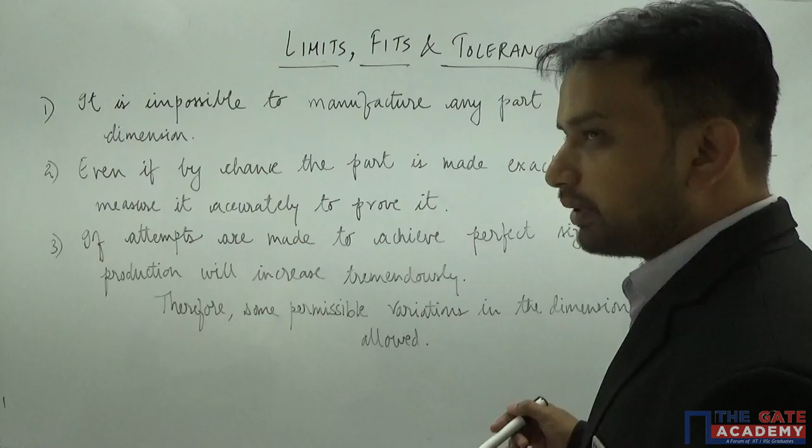I hope you have understood so far completely, and I'm going to jot down some points here because there are so many things to write today. So on the board we have mentioned the exact same thing we have already discussed. Let us go through all these points one by one. The first point says: it is impossible to manufacture any part precisely to a given dimension.

Even if by chance the part is made exact, it is impossible to measure it accurately to prove it. If attempts are made to achieve perfect size, the cost of production will increase tremendously. Therefore, some permissible variations in the dimensions have to be allowed. So now we have understood why the deviations occur, and we are going to step into the concept of limits, fits and tolerances.

After discussing the deviations, the first point you need to learn is the limits. What are the limits? Say this was the shaft that we wanted to manufacture, and its length was 100 mm. So instead of giving the manufacturer the design as exact, we are going to provide some relaxation to him, because we know he's a good and talented manufacturer.

There is no doubt in his abilities, even though because of all these factors there will be certain variations. So what we are going to do is provide a relaxation: if you can't manufacture it exactly 100 mm in size, it is okay if it lies between 99 mm to 101 mm. That means you are getting a relaxation of 2 mm, which would be easier for you to manufacture within this limit. Then he is going to agree because he has got a certain relaxation. So 99, which is the minimum limit, and 101 is known as the maximum limit. The size or dimension is made to lie between two limits, maximum and minimum.

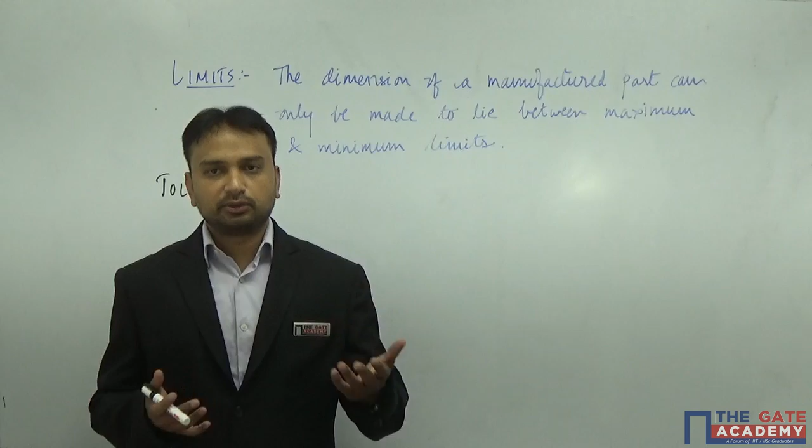Let us have a look at the definition of tolerance. The permissible variation in size or dimension is called tolerance. The difference between maximum and minimum limit is known as the tolerance zone. If the size of the component lies within this zone, it is accepted. If it crosses the minimum or maximum mark, it is rejected.

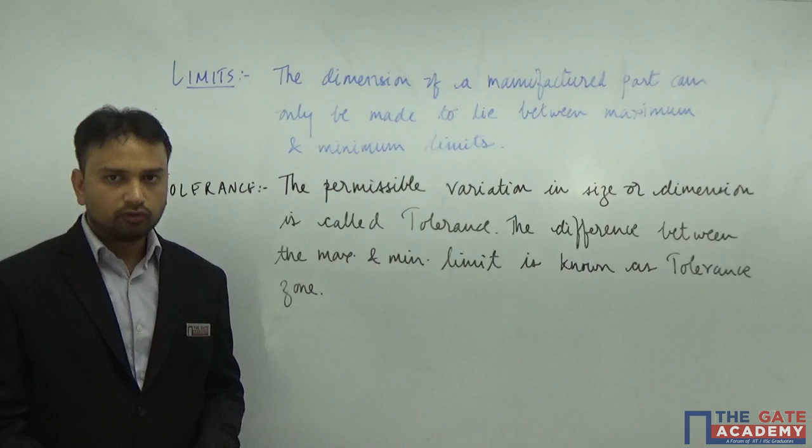After learning about limits and tolerance, let us talk about the systems of writing tolerance. The first system is unilateral. Unilateral means there is some basic size, which is the nominal size you desire, and the maximum and minimum limits have to be shown with respect to this basic size. The dimension of a part is allowed to vary only on one side of the basic size in the unilateral tolerance system.

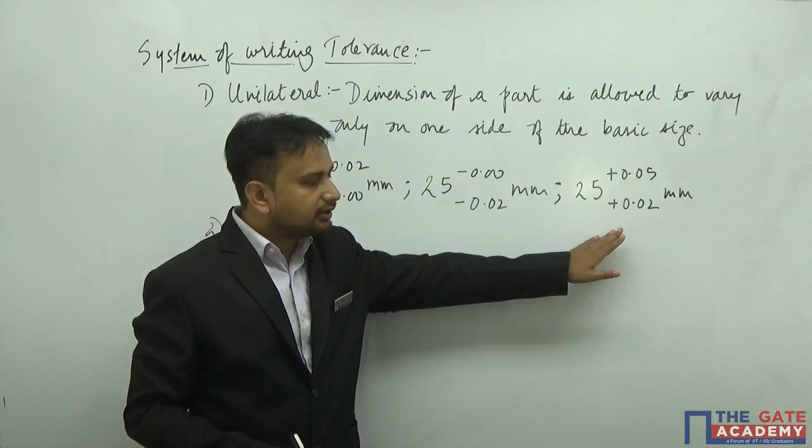For example: 25 plus 0.02, plus 0.00 mm. The basic size is the minimum limit itself, and 25 plus 0.02 is the upper limit. Similarly, on the negative side, the size may get bigger than the basic size, or smaller than the basic size, but in these unilateral examples it only grows bigger - it doesn't come down below the basic size. So the minimum limit is the basic size itself in these cases.

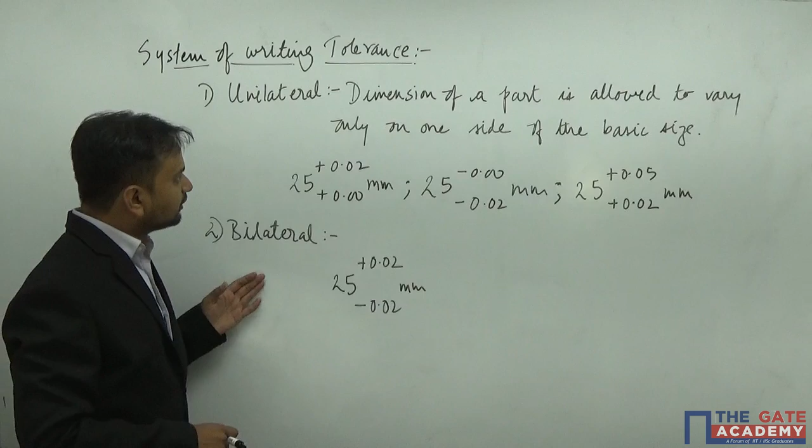This is known as unilateral tolerance, and similarly there is another system called bilateral tolerance. For example: 25 plus 0.02 and minus 0.02 mm. It can grow bigger than the basic size or become smaller than the basic size, but the dimension has to lie between these two limits. I hope you've got the point of the unilateral and bilateral systems.

Now let us move to the next point. After learning about the limits, the tolerances, and the systems of writing tolerance, it's time to discuss the different terminologies. There are many terminologies associated with limits, fits and tolerances. Before we start solving numerical problems, we have to go through all this theoretical part and these terminologies, which are very simple to understand - nothing complicated at all.

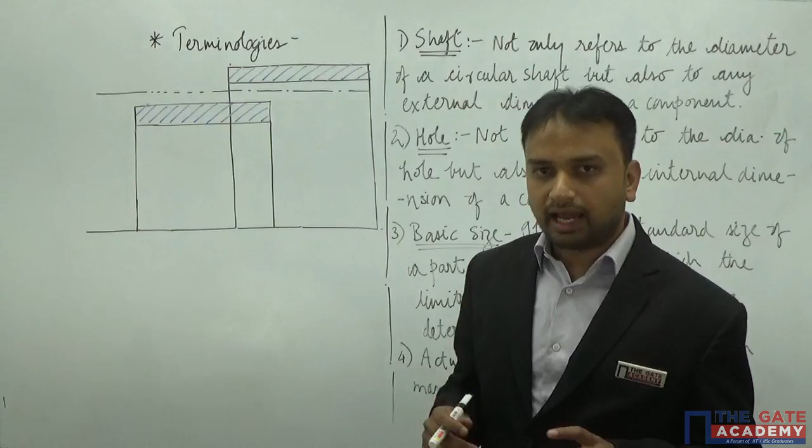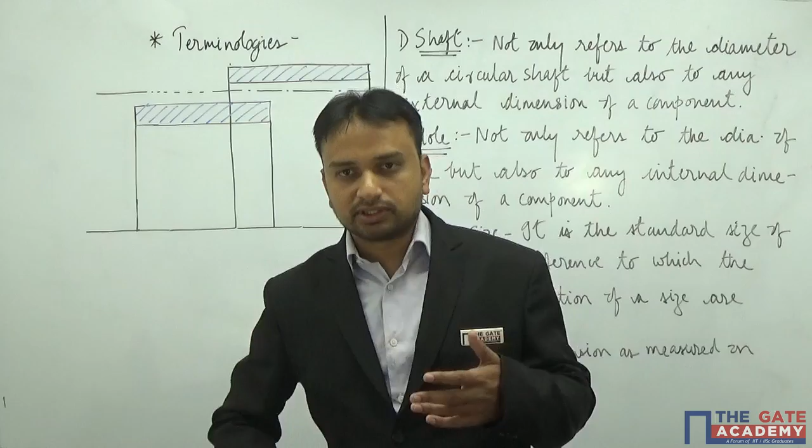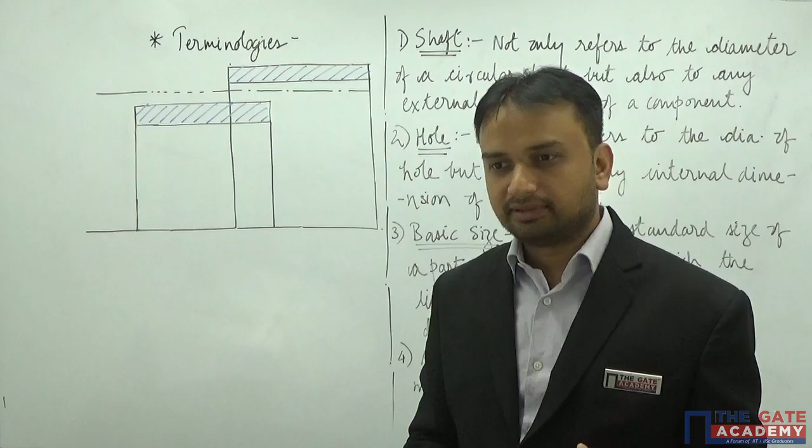Firstly, we are going to look at diagrams of this kind, and by now you would have recognized that this diagram shows a shaft and a hole. This outer, bigger rectangle is the front view of the hole, and there is a shaft which is smaller in diameter with respect to the hole, because a shaft goes inside a hole in any assembly. Take the example of this marker and its cap - let's say this is the shaft and this is the hole, and it goes inside and gets placed like this, and this is how we get an assembly. In a similar manner, all assemblies are assembled.

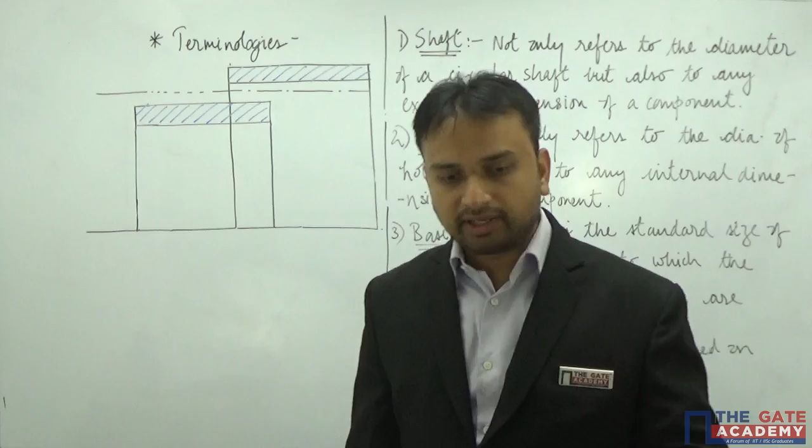So just now we have determined that you provide the limits to everything that you manufacture, whether it is hole or shaft. In a similar manner, hole has got two limits. The hole could be as big as this size from here till here, and it could be as small as this size from here till here. Also, the hole could be of any size between these two dimensions, lying anywhere within the shaded area.

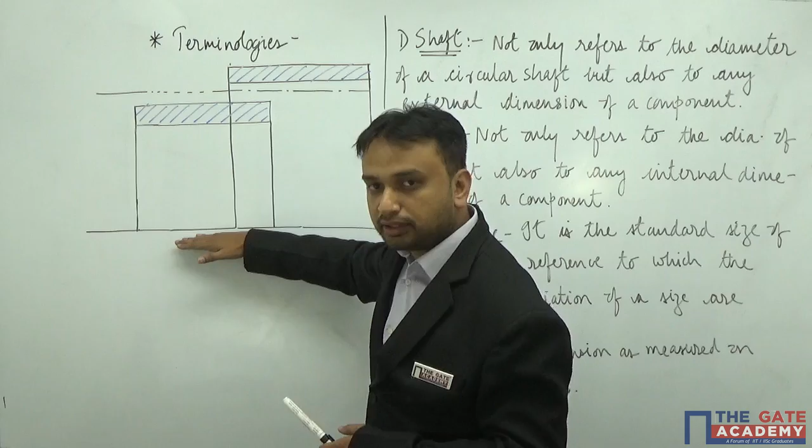In a similar manner, the shaft could be as big as this dimension from here till here, or as small as this size from here till here, or it can lie anywhere between this dimension and any point over here in the shaded area. I hope you have got the point. So this is nothing but the tolerance zone.

Now we are going to talk about certain terminologies. As you can see here, the shaft - wherever we refer to shaft, it is not the actual shaft always. Shaft not only refers to the diameter of a circular shaft, but also to any external dimension of a component. It is not necessary that we are going to assemble shafts only every time.

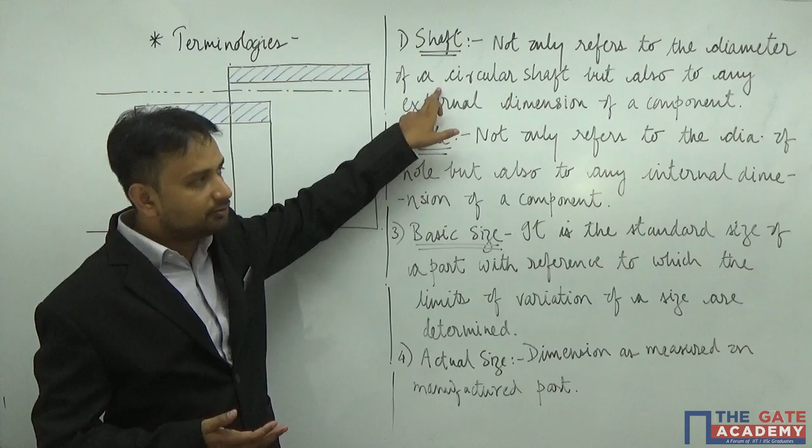Assembly could be of anything. So it does not only refer to the diameter of a circular shaft, but also to any external dimension of a component. In a similar manner, hole not only refers to the diameter of the hole, but also refers to any internal dimension of any component. I hope by now you are getting the point.

Now, basic size - as we have already discussed, what is basic size? It is a size with reference to which you determine the limits. It is the standard size, as the definition says, of a part with reference to which the limits of variation of size are determined.

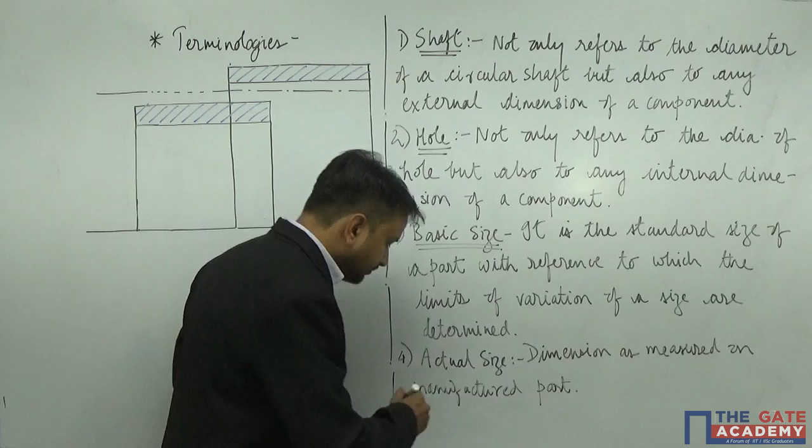And there is another thing called actual size. Now what is this actual size? Actual size means the dimension as measured on the manufactured part. And now you also understand that there will be a difference between actual size and the basic size.

Let us move to a few more terminologies. There are many terminologies actually we have to see, so let us buck up.

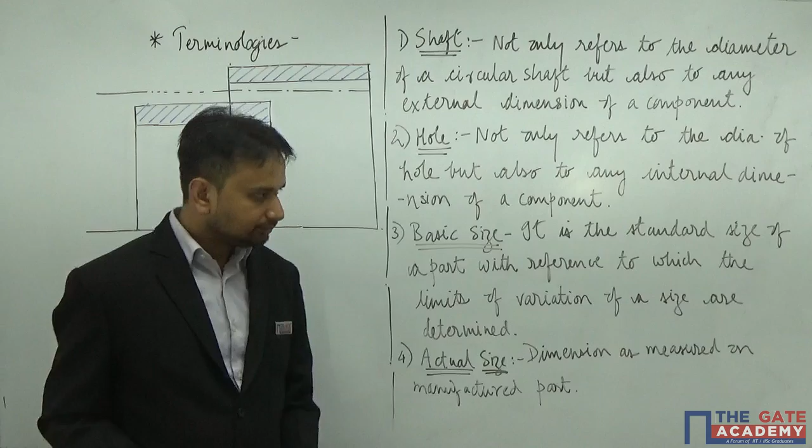Now the next point I want to tell you is zero line. What is zero line? A straight line drawn to represent the basic size. Now could you indicate zero line on this diagram? Yes, absolutely - this is your zero line over here. This line that runs between the sizes of shaft and the hole, this is the zero line, and it represents the basic size. So this size is going to be your basic size - this is your basic size.

Similarly, there is another term called deviation. Now what is deviation? It is the algebraic difference between the actual size and the basic size. Now there are two kinds of deviations: upper deviation and lower deviation.

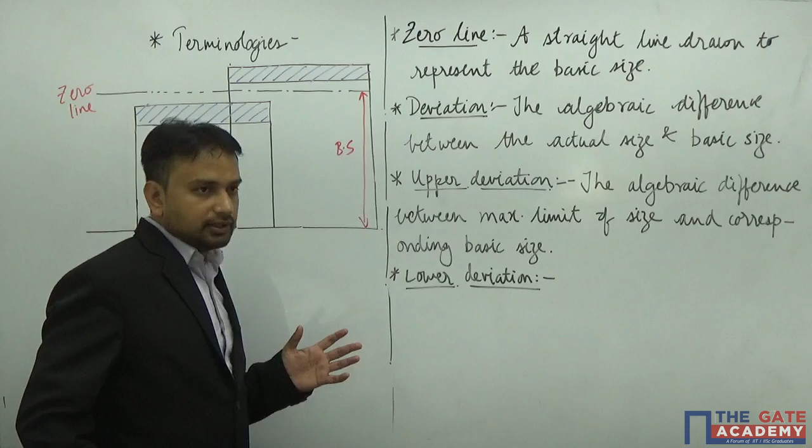Upper deviation means the algebraic difference between maximum limit of size and corresponding basic size. Let us read it once again: the algebraic difference between maximum limit of size and corresponding basic size. So if I have to determine the upper deviation for a hole - this is the hole, and the maximum limit of size, the hole could be as big as this dimension, right? And the difference between these two is nothing but the upper deviation. So this is your upper deviation.

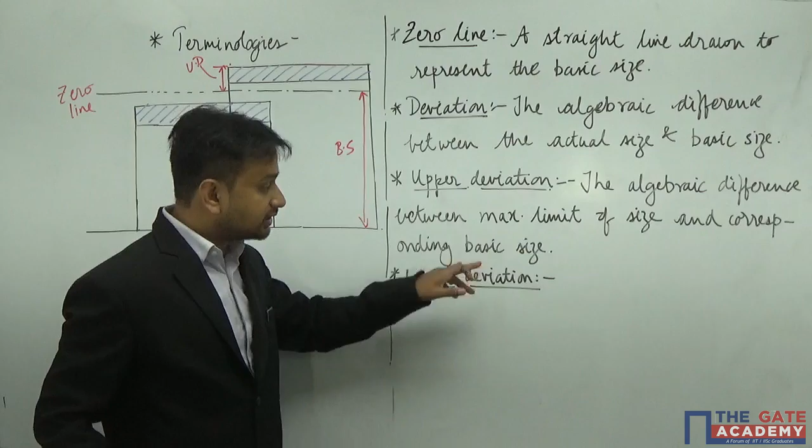In a similar manner, if you have to talk about the lower deviation - what is lower deviation? It is the algebraic difference between minimum limit of size and the corresponding basic size. This has been left up to you since you can easily follow that it is the algebraic difference between minimum limit for lower deviation, and corresponding basic size. That means for hole, the minimum limit is this - there is a little lesser space, so I am extending this line over here. I hope you can follow. So this line over here is nothing but your lower deviation. This is your lower deviation.

In a similar manner, you can determine both of these deviations for shaft. The shaft could be as big as this size, so the upper deviation will be over here. It is going to be this smaller region.

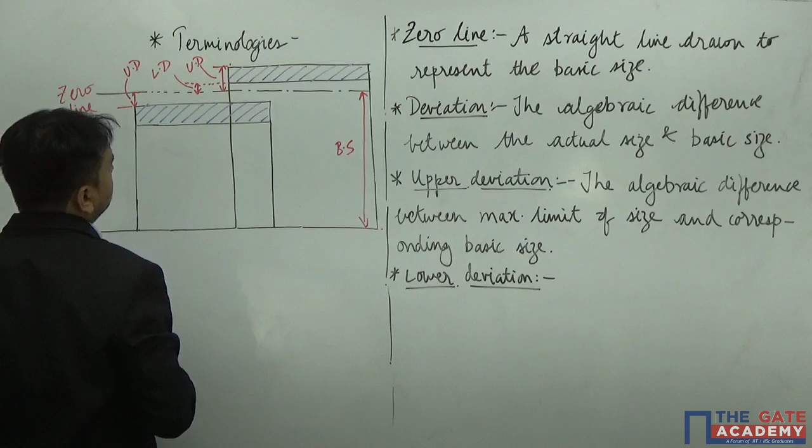So this is your upper deviation for shaft. In a similar manner, for lower deviation, it's the difference between the lower size and the basic size. So we have understood the concept of deviation now, right?

Let us move to the next very important term called fundamental deviation.

Alright my friends, now let us proceed to a very important topic called fundamental deviation. Let us firstly learn the definition for the fundamental deviation. What is that? It is one of those two deviations, either upper or lower, whichever is nearest to the zero line for either hole or shaft.

So fundamental deviation is for both hole and shaft. It's not like it's only for hole or only for shaft. It is one of those two deviations which is the smallest.

So if I have to say what is the fundamental deviation for hole, you are going to say the lower deviation. What is the fundamental deviation for shaft? You can see it is the upper deviation.

Sometimes fundamental deviations are zero also, depending upon which kind of system you are going to opt for, whether it is a hole-based system or a shaft-based system. We are going to learn about that later. But as of now, this is fundamental deviation - it is nothing but the smallest deviation in an assembly, whether it is lower deviation or upper deviation.

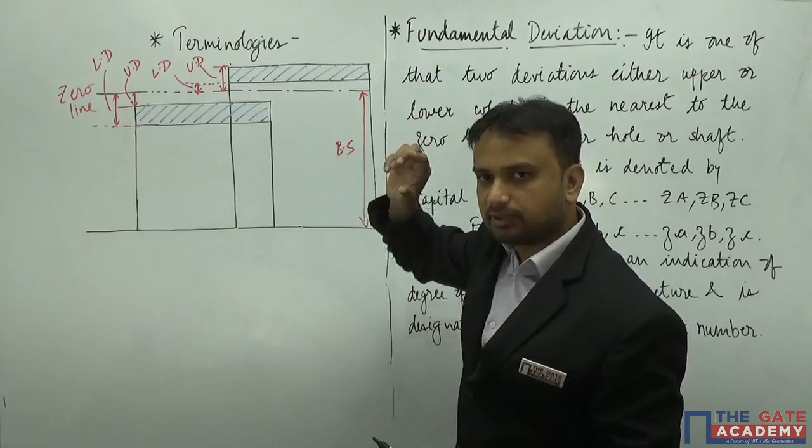Now how do you actually show it on the figure? If I have to tell you through this figure, where is the tolerance zone or the tolerance grade? You can see this strip - I have shown this strip to be a little thinner as compared to this one. That means the tolerance grade for the hole is smaller than that of the shaft.

Let me give you a wonderful example for that. Suppose when you make projects in your final year, you go to a manufacturer - suppose it's a very big company, and it takes very sophisticated orders also from NASA, ISRO and DRDO organizations like that. You also go there and ask them to manufacture a shaft. You speak to the engineer: sir, could you please manufacture a shaft of let's say diameter 50 mm. 50 mm is the diameter of your shaft.

Now he said, because it is a college project, you will not be very specific about the dimensions, are you? You said, no sir, it's simply a college project. So even if you make it 45 mm, we are fine by that. Even if you make it 55 mm, we are fine by that also. Although I have taken a huge amount of deviation, usually such deviations are not allowed, but since I'm explaining, I'm taking that liberty.

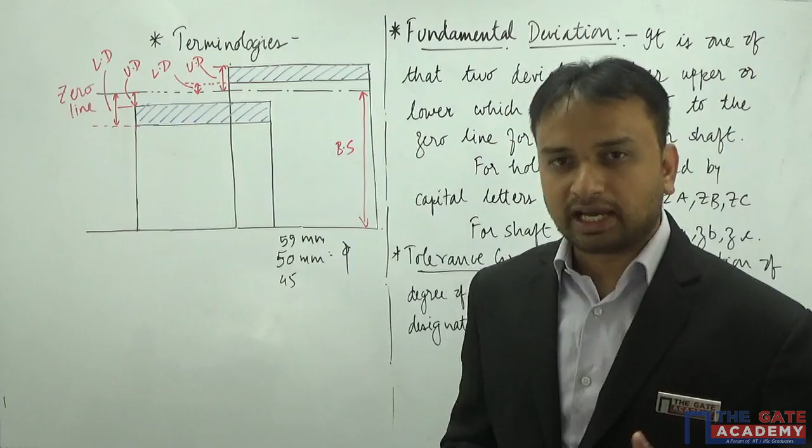So that means you have got the deviation of 10 mm. You can see it's a huge deviation, right? And because of that he said, earlier I was charging 5,000. I thought you required a very sophisticated or very accurate shaft. Now, because you're saying you're not specific about the dimension, I can produce that for 3,000.

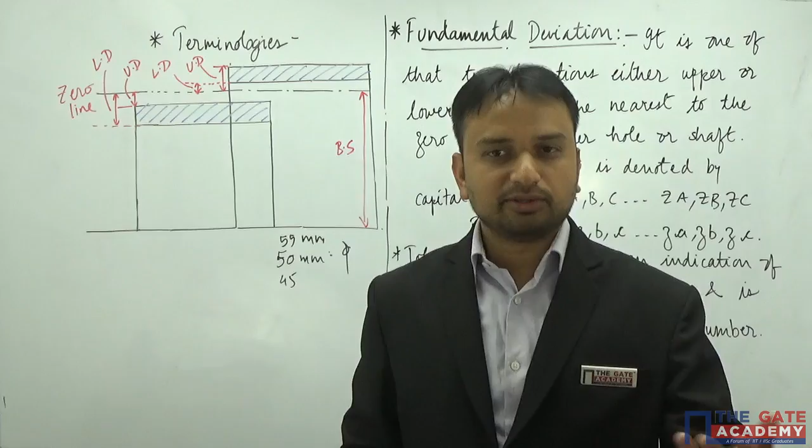So you were very happy and you came back. Now what happened just after you came back? Another order approached him, and this time the order was from, say, ISRO. ISRO or DRDO approached this guy and said, sir, again we want you to make a shaft, and its diameter is going to be 50 mm, but there are certain challenges for you. Actually, we want it to be really accurate.

So our plan is that it is not going to differ much. If you cannot manufacture 50 exactly, which is our required dimension, we will be okay with 49.8 mm and 50.2 mm, like this. So 49.8 mm till 50.2 mm is okay with us.

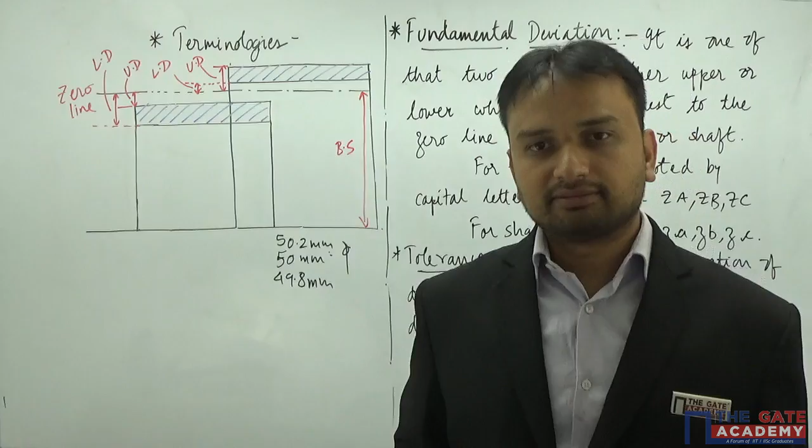Getting the point? So what is happening here is this shaft that he is going to manufacture for an organization such as ISRO, where they are very specific about the dimension, its price is going to increase. But for you people, because it was a college project, it was just 3,000 rupees.

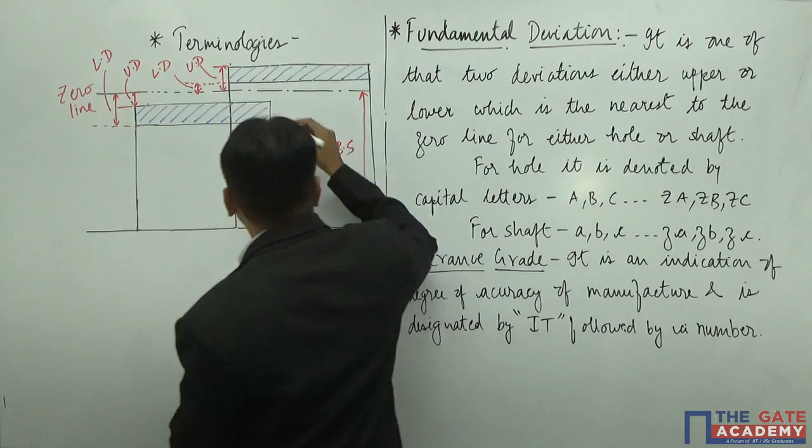The idea behind this explanation is that this tolerance zone can be bigger, like this. You can also show it or indicate like this. It can grow bigger like this. Also, it can become very small, very, very small.

So what does it mean when it is bigger, when it is wider? That means you have got a huge amount of tolerance, meaning it's some kind of college project. And when it is very, very narrow, very thin, that means they are really, really specific about the dimensions. That is why the prices change, the prices vary. So this is what we understand from this statement: it is an indication of the degree of accuracy of manufacture.

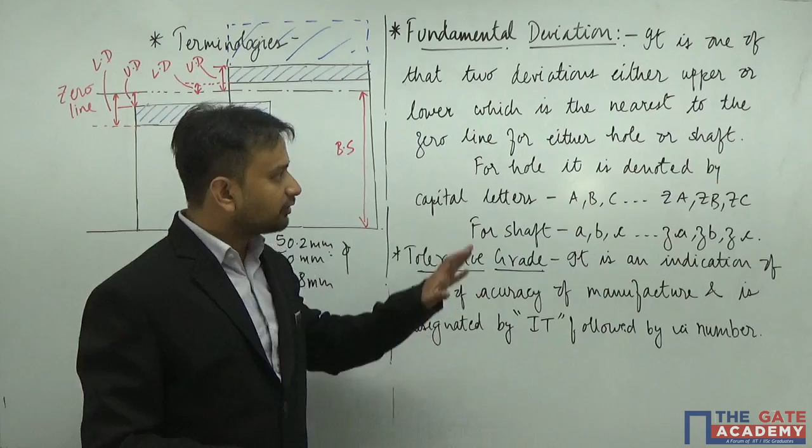If it is narrow, accuracy is more, and it is designated by IT followed by a number. We are going to talk about this later. But as of now, I hope you have understood the concept of fundamental deviation and the tolerance grade. Let us move to the next point.

Alright my friends, let us have a look at the next point, which is also very important, called fit. Now what is a fit? It can be defined as the degree of tightness or looseness between two mating parts.

So suppose an assembly, you will find that some assemblies are very easy to assemble because there is a lot of room for those two mating parts to adjust. And some are really, really tight because there is a very small amount of room. Sometimes you have to push, you have to apply a lot of effort in placing those assemblies. So a fit is nothing but the degree of tightness or looseness.

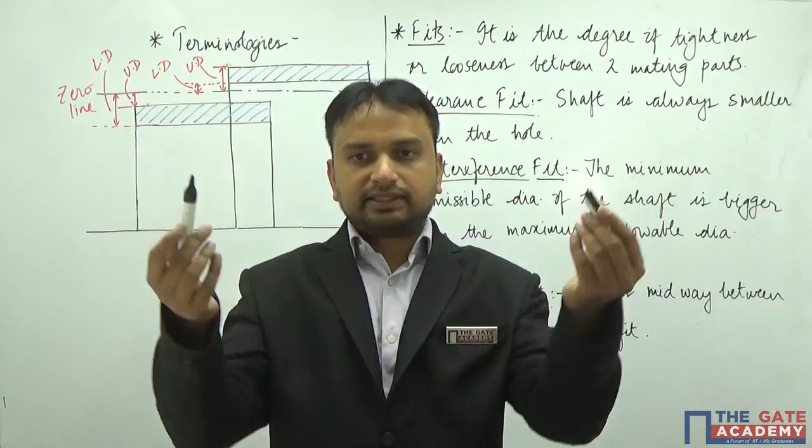So let us take the example of this marker here once again. You can see that this marker goes inside this cap very easily, but till we hear a click, we know that it is not yet done. So what we have to do is apply a small amount of force like this, and now it's done. I hope you can also hear the click.

So this click actually signifies that it is a tight fit. You have to force this marker to go inside the cap and be secure there, like this. So this actually creates an airtight seal, isn't it? So that means this is a tight fit, and tight fit actually resembles interference fit.

Now let us talk about all the fits from the beginning. Clearance fit.

Clearance fit means the shaft size is always going to be smaller than the hole. Now you may ask, sir, the shaft size is going to vary, right? Even in the figure, the size of the shaft varies. You can see this is the shaft, this is the upper limit of the shaft, and this is the lower limit of the shaft. So which size are you actually talking about?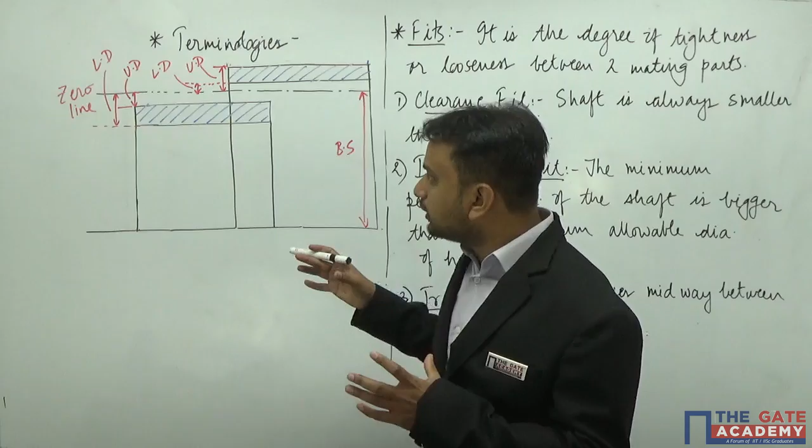That's a very nice question. Actually, I mean the maximum size of the shaft. If you take this size of the shaft, even this size is going to be smaller than the minimum size of the hole. You can see this is the minimum size of the hole, and when you place them together, you will always find a clearance between them. So this kind of fit is known as clearance fit, where the shaft is always smaller than the hole, no matter which limit you're talking about. I hope you have followed the clearance fit.

Now let us move to the interference fit. Interference fit means the minimum permissible diameter of the shaft is bigger than the maximum allowable diameter of the hole. That means the smallest possible shaft you can think of in one particular assembly is also larger than the maximum allowable diameter of the hole. Getting the point? Let me draw a figure for that.

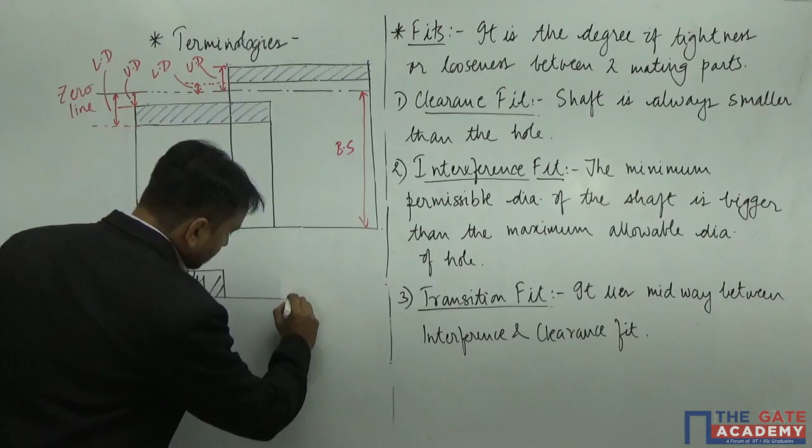So usually what we do is take this zero line, draw it like this, and represent the hole like this. I am considering a hole basis system. For those who don't know what a hole basis system is, don't worry, we'll cover that soon. For now, just accept that it is a hole basis system. Suppose the hole is 50 mm, the basic size, indicated by the zero line, and the minimum size of the hole is 50 mm itself, and the upper limit is 50.5 mm. That means this is the tolerance grade or tolerance zone of 0.5 mm. So the hole can vary by 0.5 mm like this.

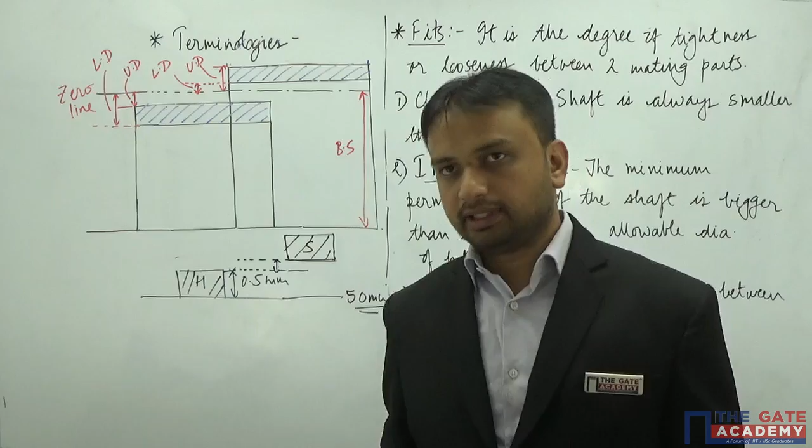And the shaft is going to lie somewhere over here, because the lowest possible size of the shaft is also even greater than... suppose this was the upper limit of the shaft. Now let us see, this is the lowest limit for the shaft. That means there is an overlap. This kind of fit results in an interference fit, where you have to force the shaft to move into the hole and reside. Getting the point? So this is nothing but the interference fit, also known as tight fit.

The best example I can give you, which you have also observed, is your lunch boxes and tiffin boxes. You must have heard of Tupperware, a company that produces airtight containers, especially tiffin boxes and water bottles. They are famous for creating airtight containers. How do they manage to create airtight containers? It is all about the fit, the degree of tightness or looseness.

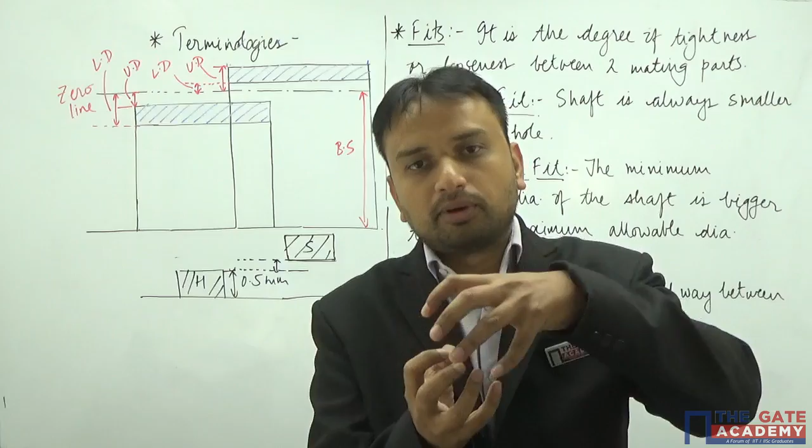You must have observed that placing the cap over the container in Tupperware containers is not an easy task. You have to apply a certain amount of effort to do that, because the caps are made a little smaller than the size of the container. That is why they are able to hold it properly and create an interference fit. The exterior dimension of the container is bigger, whereas the cap is smaller. So you have to stretch it, since it is a stretchable material, and that is why it holds and becomes airtight. I hope you have followed my example.

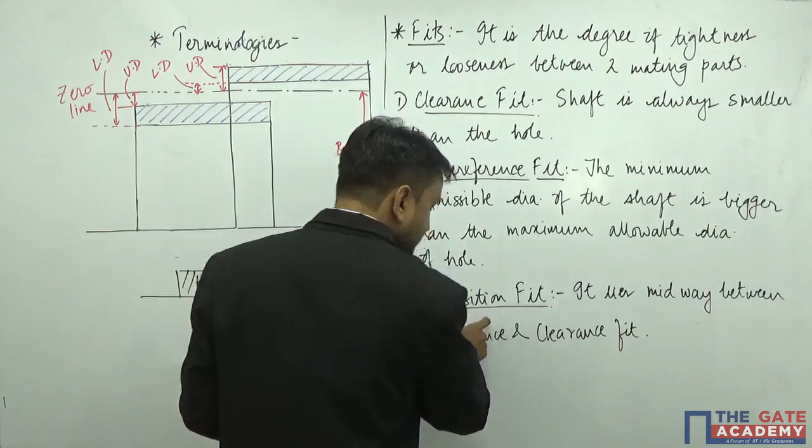Now let us move to the next point. It is known as transition fit. Now what is a transition fit? It lies midway between interference and clearance fit.

So what happens is that for the same hole and shaft assembly, you are going to obtain clearance fit sometimes, and sometimes you are going to obtain interference fit. Now how is it possible? I want you to think over it. It's a point to ponder. So what you have to do is think about when this case is possible, sometimes you obtain an interference fit, sometimes a clearance fit.

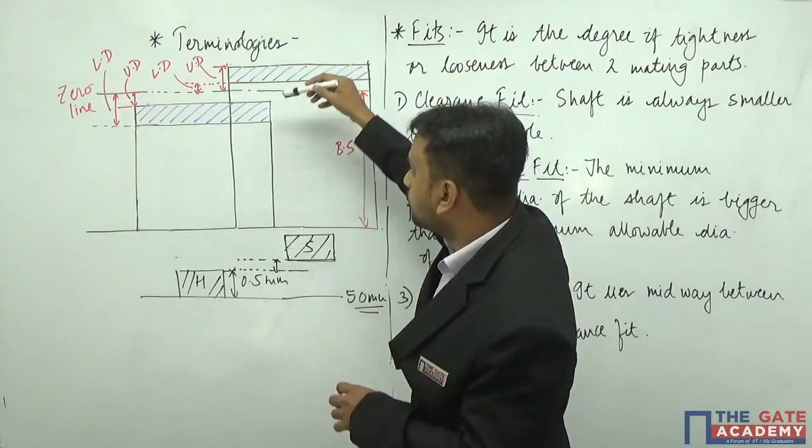Let me give you a hint: this whole magic lies between the tolerances, where these tolerances actually lie. I told you that the hole could lie between any size, between these dimensions. It could be like this, over here. It can have any number of dimensions between these two limits. Similarly, the same thing goes for the shaft. Now what you have to do is think of such a system where these limits coincide.

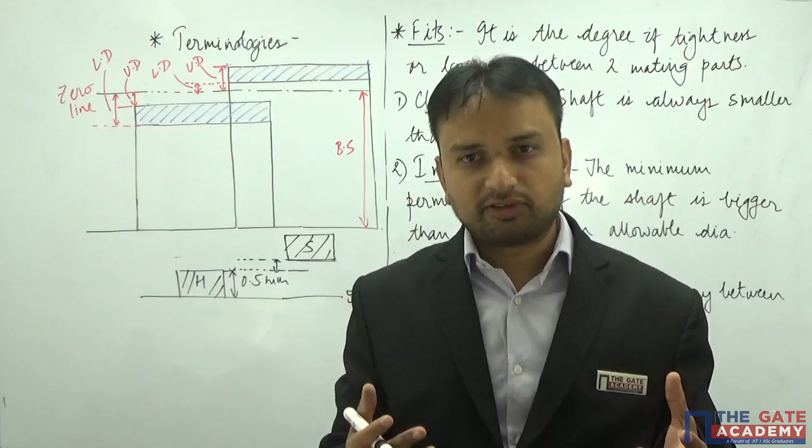Now I have given you enough hint. I want you to think about it and do it yourself. A small home assignment for you. Now let us move to the next statement.

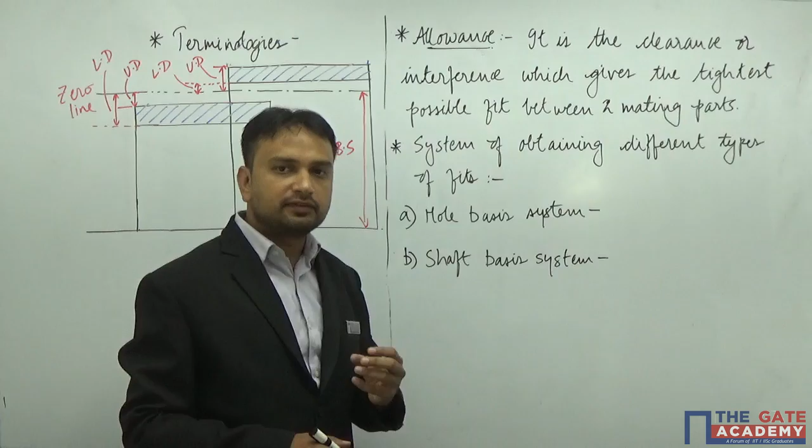Alright friends, let us move to the next important point called allowance. Let us define it first: it is the clearance or interference which gives the tightest possible fit between two mating parts. Let us read it once again: it is the clearance or the interference which gives the tightest possible fit between two mating parts. So any clearance or any interference that gives the tightest possible fit is known as the allowance.

If you are not able to follow it the first time, read it once again, and I'm going to anyway give you an example. We are going to solve an example that will showcase the allowance. So it is the clearance or interference which gives the tightest possible fit between two mating parts.

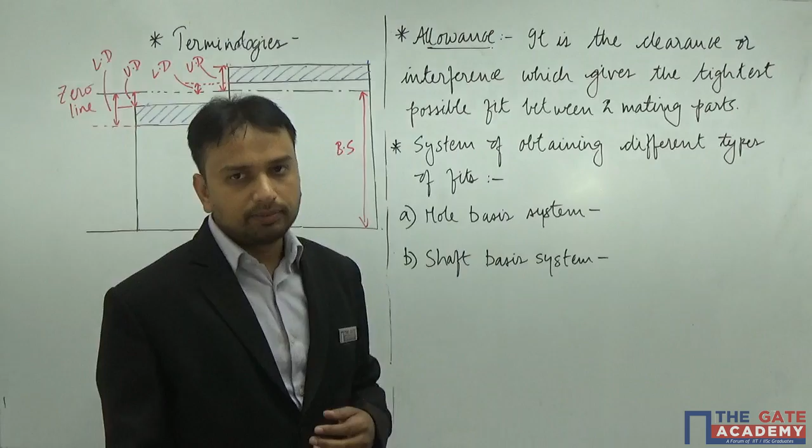Now let us talk about the systems of obtaining different types of fits. We have just now covered an important point called fits, and now we are going to learn about the different systems of obtaining different types of fits. So the first system is the hole basis system. Now what is the hole basis system? Let me tell you that. So the hole basis system

utilizes the fact that firstly, a hole will be created and the shaft dimension will be determined on the basis of the hole dimension. After learning about the hole basis system, let us talk about the shaft basis system. It is of a similar kind; the only difference is that the shaft dimension will be determined first, and then the hole dimension will be determined. Now which one are you going to prefer?

As engineers, we prefer the hole basis system. Why? Because it is easier for us to firstly drill a hole and design a shaft based upon that dimension. In the shaft basis system, the shaft will already be there, and then to make a hole of that dimension where the shaft can reside securely, you need a long process. If you're literally talking about a hole for the shaft, you need a manufactured drill bit, custom made only for that shaft, which incurs a lot of money, effort and time. So to reduce our effort, time and money, we go for the hole basis system. It is generally more preferred.

Getting the point? Yeah, so that's all about the hole basis system and shaft basis system. Now let us move to the next point. Now we are going to discuss the designation, which is a very important topic — it's like the heart of this chapter, limits, fits and tolerances.

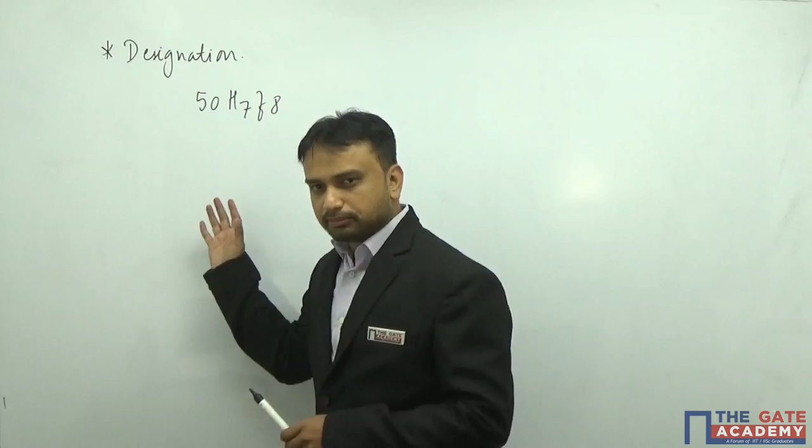So what happens is that whenever you create an assembly, you designate that assembly in some manner. We'll keep on jotting the points also. Now what is this 50 over here? Let me tell you, this 50 is the basic size. So 50 over here is nothing but your basic size.

Now we learned that something for a hole is represented with capital letters. What was that? That was the fundamental deviation, if you can recall. Fundamental deviation is the nearest deviation, whether it is upper deviation or lower deviation, for a hole or a shaft. Getting the point?

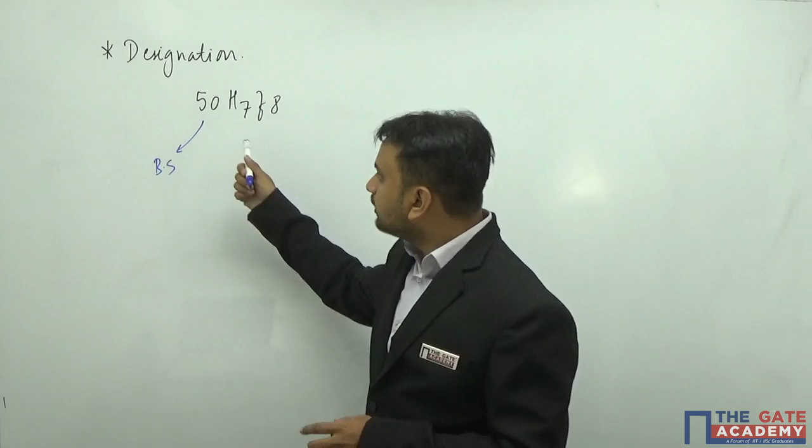So H indicates the fundamental deviation, and you have already learned that it is designated using capital letters. So this is the fundamental deviation, but for what? For hole, because it is capital letters. So fundamental deviation for holes.

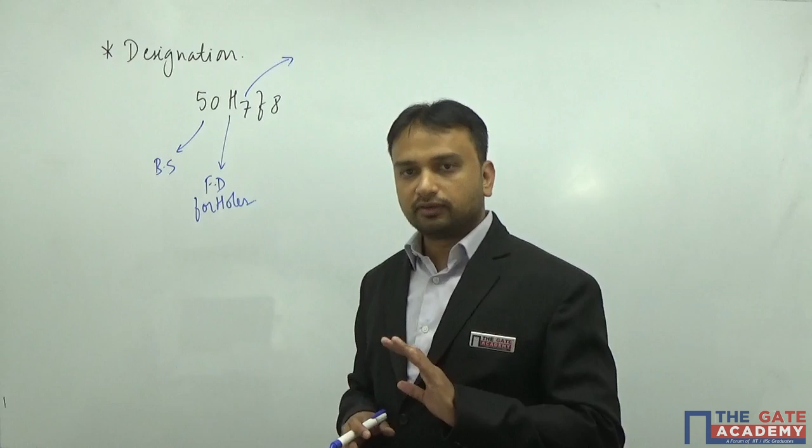And what is this 7 here? I have not told you about this thing yet, so let me tell you directly that 7 indicates the tolerance grade. Remember, in the definition of tolerance grade, we saw that IT, the tolerance grade, is represented using IT followed by a number. That number is nothing but this 7. Now the only thing is that we are not representing IT in the designation, but actually it stands for that itself.

Just be patient, we are going to cover the entire thing very systematically. So this is your tolerance grade. Tolerance grade, now for what? Of course it is for holes, because 7 is associated with H, right?

In a similar manner, you can see this F over here, and by now you can understand fundamental deviation. It is a fundamental deviation, but for what? It is for the shaft, because it is represented in small letters. So this is the fundamental deviation for shafts.

And what does this 8 stand for? Again, 8 represents IT8 actually. Since we are talking about the designation, that is why we don't have IT mentioned over here, but actually it stands for the same thing, IT8. Now I will be telling you about the importance of IT8 and IT7, just let us finish this part.

So this is tolerance grade again, but for what? For shafts. Very good. So this is your designation part. I hope it is very clear to you, right?

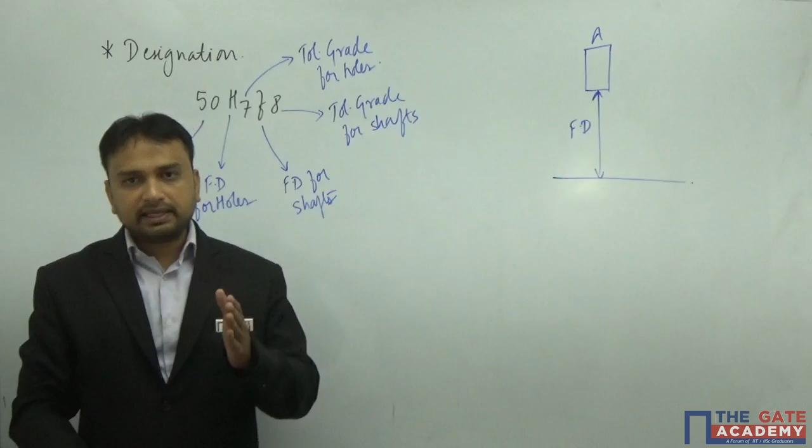In a similar manner, for B it is lesser, C is even lesser, CD, D, E, EF, and so on and so forth. You can see that it goes down also, right? Starting from A till ZC, it declines. The fundamental deviation is declining.

Now there is one special case for the hole basis system. What was that, and what is that? When it is coming down, it is declining like this, and you can see that at one particular point the fundamental deviation becomes 0. What is that? What is the code name? It is H. So whenever you see H mentioned anywhere, you are talking about the fundamental deviation which is 0, and for whom? For holes, because it has been represented in capital letters. I hope that it is clear.

We are following the exact same thing, but the direction and the representation is different. They are represented in small letters. So A, B, C, then CD, D, E, exactly the same thing, till ZC it is going on, right? Now it is climbing up.

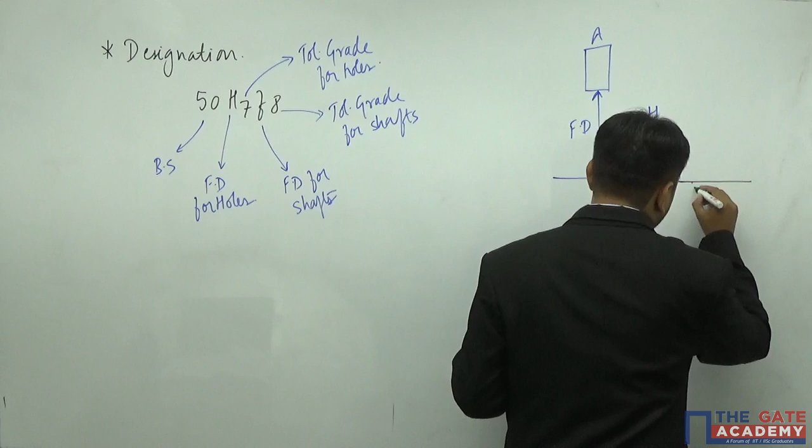Now you can see there is a special case. The fundamental deviation for shaft becomes 0 at one particular point while climbing up. What is that? It is small h. Yeah, so for these two special cases, the fundamental deviations are 0.

That means how many fundamental deviations are there? There are 28 types of fundamental deviations. If you want, you can count them from A to ZC. There are 28 fundamental deviations. I hope it is clear, and how it has been represented, it is also clear.

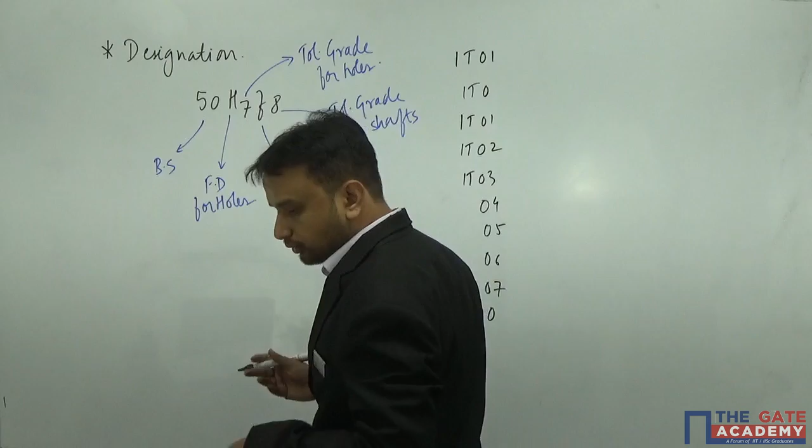Now let us talk about the tolerance grade. The tolerance grade is actually given by, it starts from IT01, IT0, right? IT0 and IT01, IT02, IT03, 04, 05, 06, 07, 08... or no, just a minute, I made a small mistake. Sorry, there will be no zeros over here now. So after IT0, it will be IT1, 2, 3, 4, 5, 6, 7, 8. Similarly, 9, then 10, 11, 12, 13, 14, 15, and 16. And everywhere it is IT, like this, okay? IT7, IT8, IT9.

Now these are just the codes, okay? They contain some meaning, right? But for that you have to deduce the meanings. Now what happens is that when you're talking about the accuracy, these IT grades are actually so fine that we do not use them for general purpose. So let us not talk about these IT grades, because they are very fine, very small. That means when you move upwards till IT01, your accuracy is actually increasing.

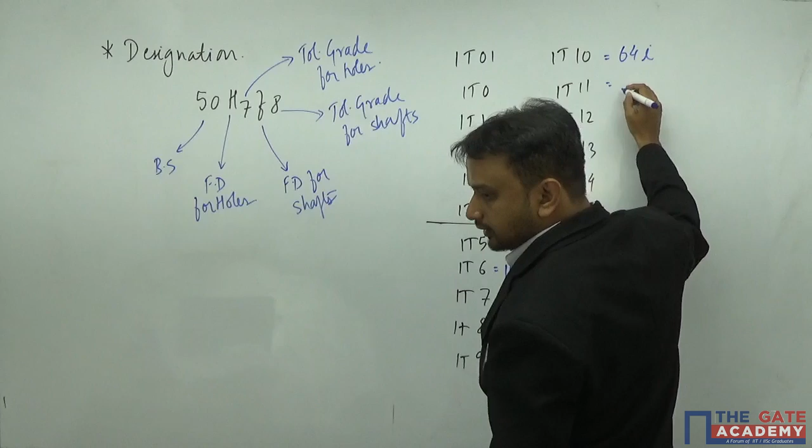Now let us talk about IT5 onwards. IT5 has some value, and what is that value? Let me indicate that with a different ink. It is 7i. Then it is 10i for IT6, then for IT7 it is 16i, for IT8 it is 25i, and then 40i, then for IT10 it is 64i, and for IT11 it is 100i, for IT12 it is 160i, for IT13 it is 250i, for IT14 it is 400i, for IT15 it's 640i, and for IT16 it is 1000i. Got the point?

Now what is actually happening here, let me tell you. I, what is I? Firstly, let us talk about I. Let us define what is I. I is nothing but a constant. Now it must be having some name, right? Yes, so I has a name, and it stands for standard tolerance unit. I am going to mention it over here. Will it be visible? Yes, of course. So I is nothing but standard tolerance unit.

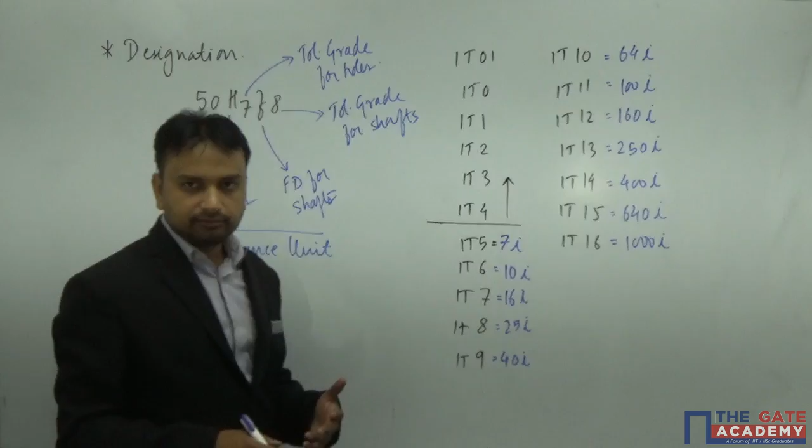Now I has to be actually computed. How are you going to compute I? I is just one number which is in microns. It is a dimension, it is a length, you can say. It is computed using this formula: 0.45 times d to the power 1 by 3, plus 0.001 times d. So this is how you are going to compute the standard tolerance unit, I.

But for doing that, what you have to do is you have to determine this d. Now what is this d? Do not be mistaken, d is not the diameter of the shaft or hole. Let me tell you, it is not the diameter of hole or the shaft. Actually, d is nothing but the geometric mean of diameter step. Now what does it mean? Let me repeat once again: D is the geometric mean of diameter step.

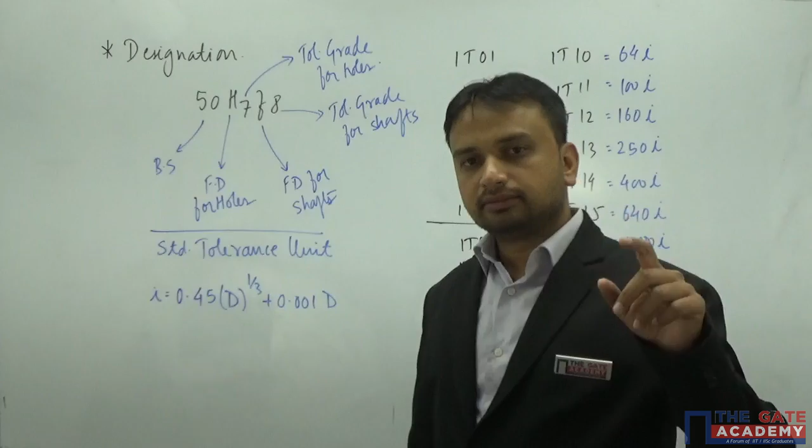Now, how do you calculate the geometric mean? It is under root of some constant A times some constant B, right? Or when I am talking about the diameter step, let me show you the diameter step, and let me indicate the diameter step using, let's say diameter step is D1 and D2. So what will be D over here? D will be under root of D1 times D2.

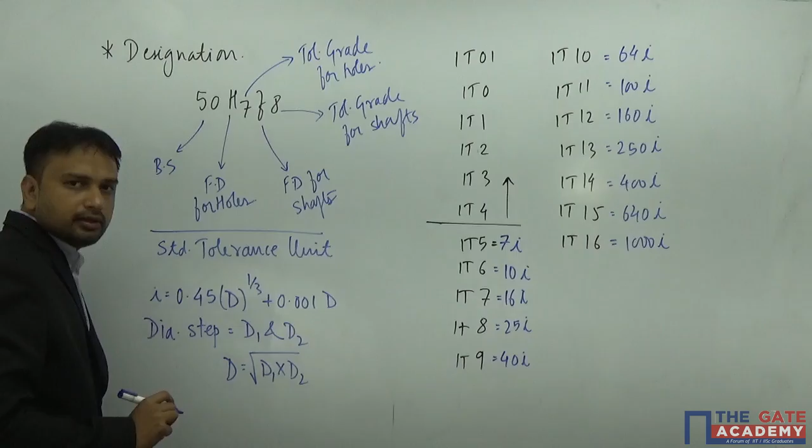Getting the point? I hope you are following. So D is nothing but the diameter step. Now what is a diameter step? Let me tell you. Certain organizations have grouped certain diameters, because this i, the standard tolerance unit, is in microns.

Although you are going to put the value for D over here in mm, i is going to be already in microns. The unit conversion has already been taken care of. You don't have to convert it into microns, just directly put it in mm and you will get the answer in microns. That means i has a very small value, right?

If you find the i for each and every diameter, suppose for 50 it's going to be something else, for 51 something else, 52, 53, 54 mm, I'm talking about the diameter of the shaft. So for each shaft with only 1 mm difference, you obtain n number of values for i, one specific value for every shaft. But you'll realize the difference between two i's is not much, because it's in microns.

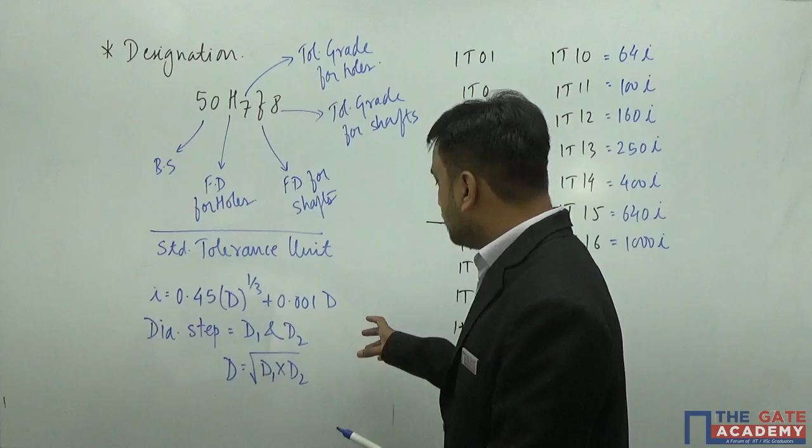These diameters have been specified by IS 919, and we use these two diameter steps to determine the geometric mean, which is D, and put this value in the formula to obtain i in microns. So once you've got the value for i, and it's a constant of course, you put that value here.

Suppose i is say 5 microns. That means for IT5 it's going to be 7i, that is 7 into 5 microns, which is 35 microns. Similarly over here 50 microns, right? 16 into i, 25 into i, 40 into i, so on and so forth.

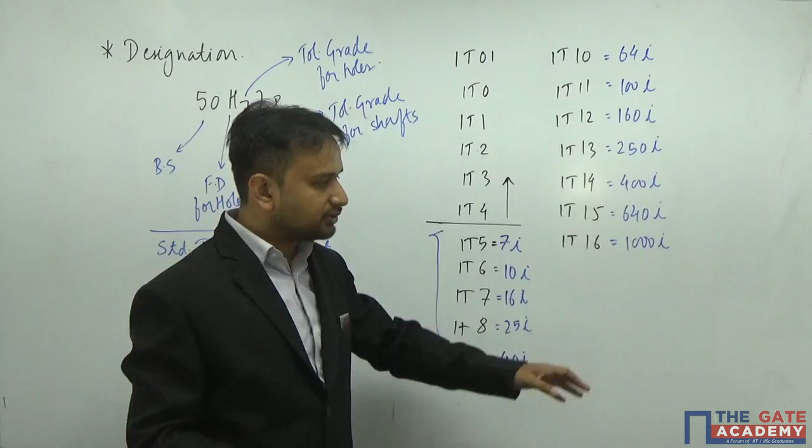That means for IT16 the size of the window is going to be huge, very high compared to 7i. So usually we deal with values between 7i to 16i and 25i also. You'll be using a lot of IT5s and IT8s between these. For IT16 it's actually a very inaccurate product you get, so we don't usually use this. You'll find maximum use of IT5, 6, 7 and 8.

I hope you have followed the designation, the fundamental deviation and the tolerance grade, and we will try to solve a few numericals based on the same concept. Let us move to the numerical problems.

Alright friends, so after covering all the basic terminologies regarding limits, fits and tolerances, now it's time to use that theory in solving a few numericals. These problems that I'm giving you are quite prominent in the GATE examination, and these are just example kinds of questions. You need to practice similar kinds of questions, and I hope it helps you a lot in the GATE exam if you practice similar questions from limits, fits and tolerances. Okay, so let us proceed.

So let us talk about the first problem. In this first problem, I have the data with me regarding the upper limit and the lower limit for both hole and shaft, and you need to find out a few things. Let us see what we need to find out. We have to find out the value of allowance. Okay, so I'm going to write down first what we have to find.

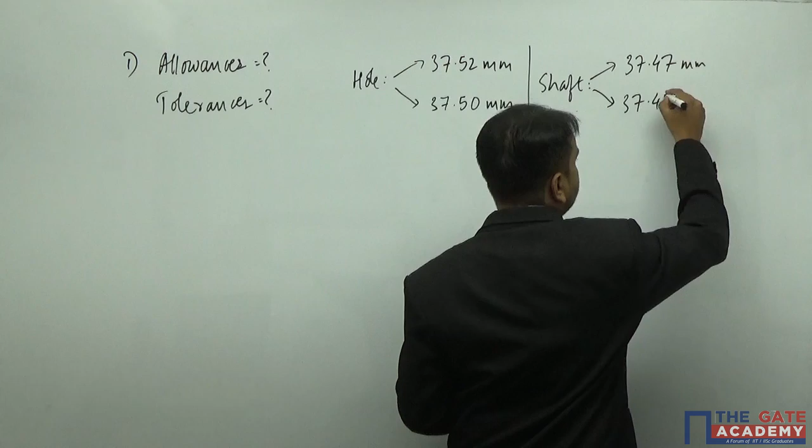Similarly, for shaft, we have again two dimensions, and what are they? They are 37.47 and 37.45. This is 45 mm.

Right. Now we have to find out the hole tolerance first and shaft tolerance, and then we will see the allowances. So what we do is, before solving such kind of problems, we have to draw the figure. Now the figure would look something like this.

Now see, can you tell me what is going to be the basic size here? You can see it is 37 over here and 37. So let us see the basic size is 37 mm, right? So this is 37 mm, and 37.50 to 37.52. This is the hole tolerance.

Yeah. So the bracket or the window would look something like this. So the hole has a lower limit of 37.50. It will be a little higher than this, 0.5 mm higher from the zero line, and it will be 37.52 mm over here.

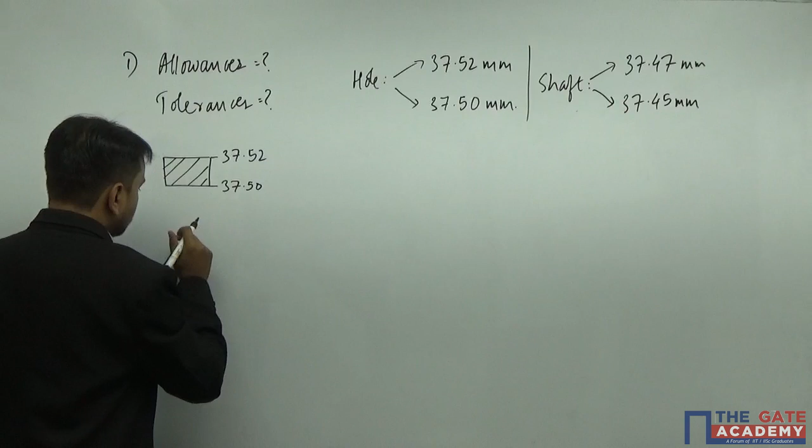Similarly, for shaft, you can see the shaft also has the lower limit and upper limit above the basic size, right? Above the zero line. So you can see 37.47. We'll do one thing, to make some space here, I am going to draw the zero line over here. It is just a representation.

So 37.47 and 37.45, they both lie below 37.50. So we have to indicate it like this. So this is for the hole and this is for the shaft, 37.47 and 37.45.

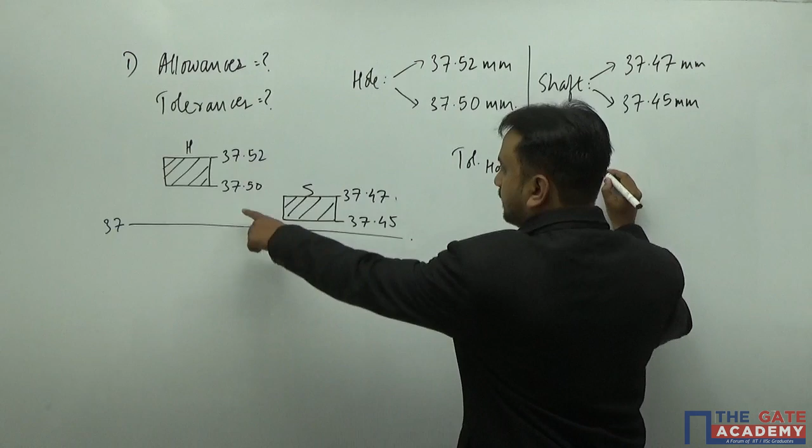Yeah. Now the shaft tolerance and the hole tolerance. You can see it is 37.52 minus 37.50. So that means it is 0.02 mm. So the width of this window is going to be 0.02 mm.

And similarly for shaft also, you can see the tolerance for the shaft is 37.47 minus 37.45 mm. That means again it is 0.02 mm. So the hole tolerance and the shaft tolerance both are same, which is 0.02 mm.

Like this. So in this manner you can determine the hole and shaft tolerance using this diagram. This diagram is very important because it gives you an idea like whether the fit is going to be a clearance fit or the interference fit.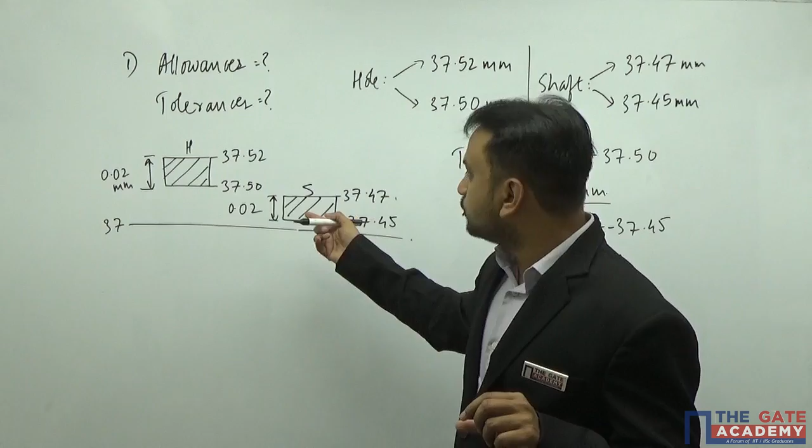So would you be able to answer if I ask you which kind of fit this situation is going to give you? You can see that the minimum hole size is 37.5 and the maximum size of shaft is 37.47, which is still lesser than the minimum size of the hole. That means in any case there will be a clearance of 0.03 mm, right? So this is clearly a clearance fit.

Getting the point? Now let us move to the allowance. Now what is allowance? From the definition, you must have seen that the allowance is something, whether it is clearance fit or an interference fit, or we can say that the allowance is a positive allowance or the negative allowance, but it should provide the tightest fit possible, right?

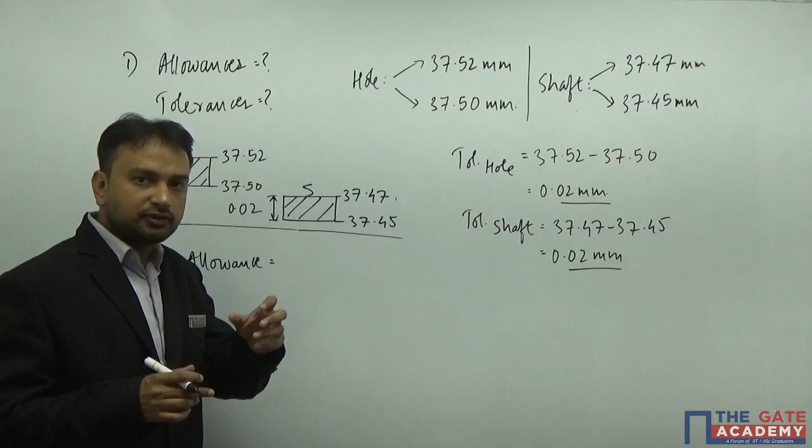So here you can see what is the tightest possible fit, yeah, you can see the tightest possible fit you are going to get only when you have the hole of 37.5 and the shaft of 37.47. That means the least size, the smallest size of the hole and the maximum size of the shaft will give you the tightest fit, the minimum clearance it is going to give you, right?

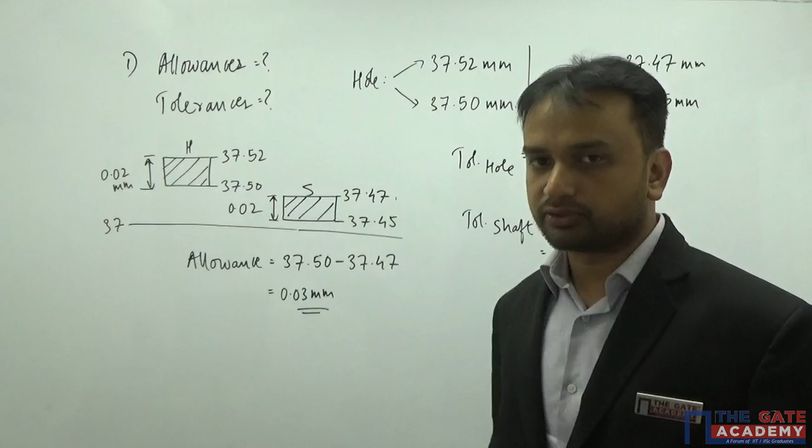So you can see that 37.50 minus 37.47 is going to give you the tightest possible fit, which is 0.03 mm. So which is nothing but the allowance, right? So as we discussed earlier when we were discussing about the allowance, that it will give you the tightest possible fit. So in this way, my friends, we have to solve this kind of problem. This was a very, very basic and very easy problem, just to give you an idea, give you the feel.

I'm solving it over here. Okay, now we will move to the next problem, which is a little tricky, and you will get an idea how to solve that kind of problem, and which is very prominent in the GATE exam also. Right? So let us proceed further.

Alright my friends, have a look here. This is the second problem that we are going to solve, and I'm not giving you any description about this problem, because all these things mentioned on the board is what you require, right? So the first thing that is given to you is the designation of the assembly.

As we have learned in the theoretical part, the designation is given like this: 60 H8 f7. Firstly let us recall it once again: 60 stands for the basic size. H is nothing but the fundamental deviation for the hole. Why? Because it is indicated in capital letters.

And 8 stands for IT8. What is IT8? It is nothing but the tolerance grade, and it corresponds to a certain value, right? You have that value in your notebooks. It is 25 i.

And what is F? F is again the fundamental deviation, for the shaft, because small letters. And what is 7? It is the tolerance grade for the shaft, IT7. Again, it corresponds to a certain value that you have to see in your notebook.

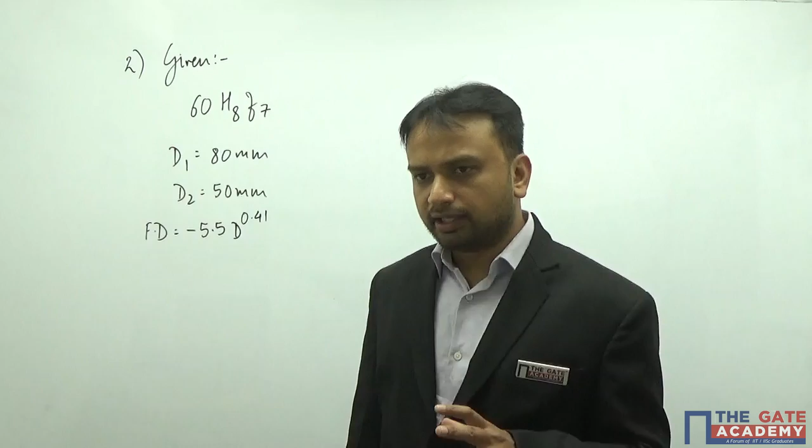Now, fundamental deviation is nothing but the nearest possible value, the nearest possible distance from the zero line, and it could be for hole also, it could be for shaft also. But for whom this fundamental deviation is given to you, there are two ways to recognize this thing.

The first way is to have a look at the sign over here. If it is negative, that means most probably it is for shaft. In the usual cases, it is going to be like that only.

And there is one more thing: observe the designation, whether it is a hole basis system or a shaft basis system, you are going to get to know. Since H is the special case where fundamental deviation is 0, that means it is a hole basis system. The hole doesn't have any fundamental deviation over here.

F, as you can see, if you make a mental picture in your brain, the figure that I showed you, you start from A, B, C, D, E, F like that. So H is the special case, and below this F is going to lie. That means we have yet not crossed the zero line. Getting the point? That means your tolerance window for the shaft is going to lie below the zero line.

Getting the point? And what is the distance between zero line and the upper limit of the shaft? That is nothing but the fundamental deviation. I hope you are getting my explanation, right? So let us proceed further. The first thing I do always is that I draw the diagrams, because it helps me in visualizing.

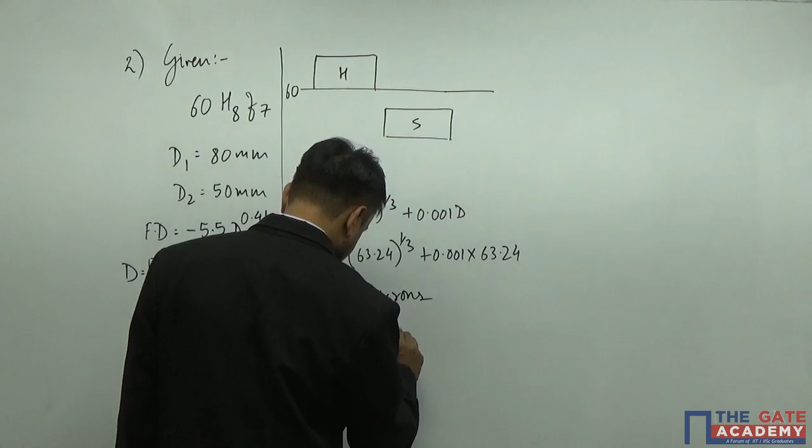Or simply you can mention 0.001856 mm. That's all. Now what to do?

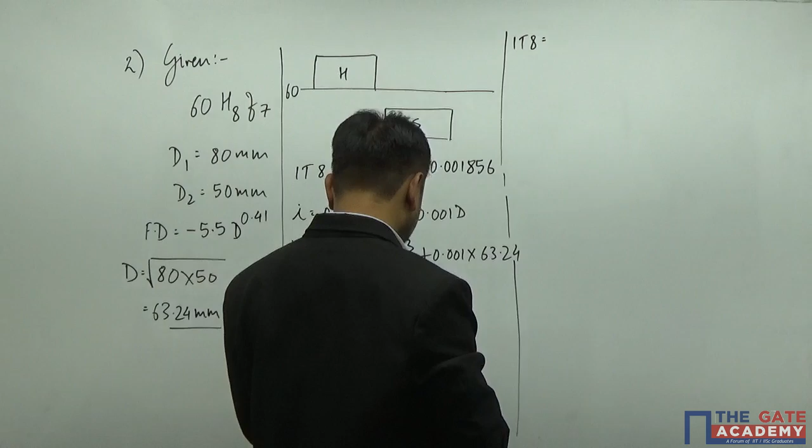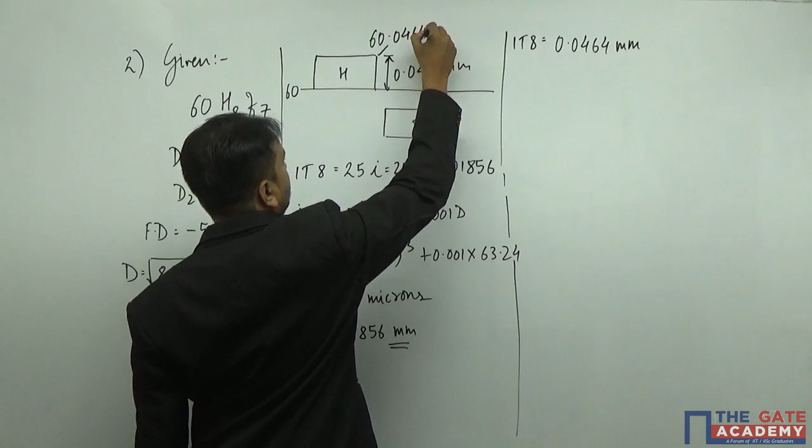Let us put this value over here to determine the window, the length of the window for hole. It's 25 times 0.001856. So IT8 you are going to get as 25 times this, I get 0.046 mm, right? So this is IT8, that means this is the tolerance window, 0.0464. That means what about the upper limit for the hole? It is 60.0464 mm. Like this, right?

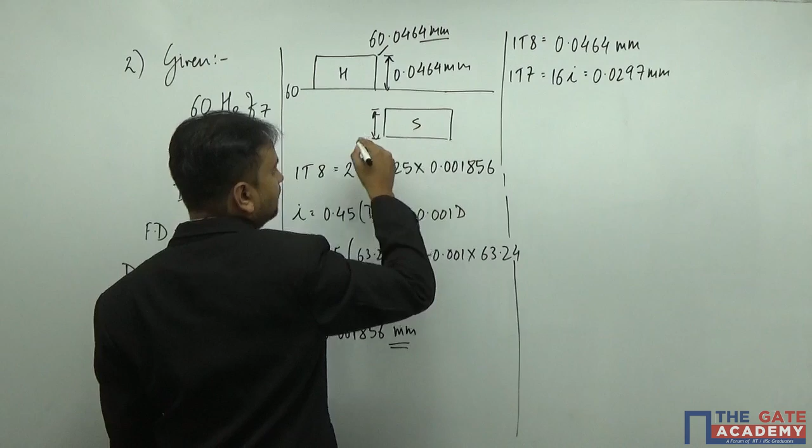And for the shaft, in a similar manner, you can determine for shaft, it is IT7, which corresponds to a value of 16I, right? And by performing the exactly same thing, just multiply 16 into this thing, you are going to get 0.0297 mm. Just try it, you are going to get the same value. That means the window for shaft is 0.0297 mm.

Now the thing is that I cannot determine the upper limit and lower limit for the shaft until I know this distance from the zero line. So for that, I have one more information, which is fundamental deviation, which is in negative direction. That means it is below the zero line. So we have to determine this fundamental deviation over here.

So fundamental deviation will be given to you as minus 5.5, and what is D? Again, you are going to take this D, not the basic size, so 63.24, and to the power 0.41. Okay, so let us see what is the fundamental deviation. It will be negative. It is minus 30.11 microns.

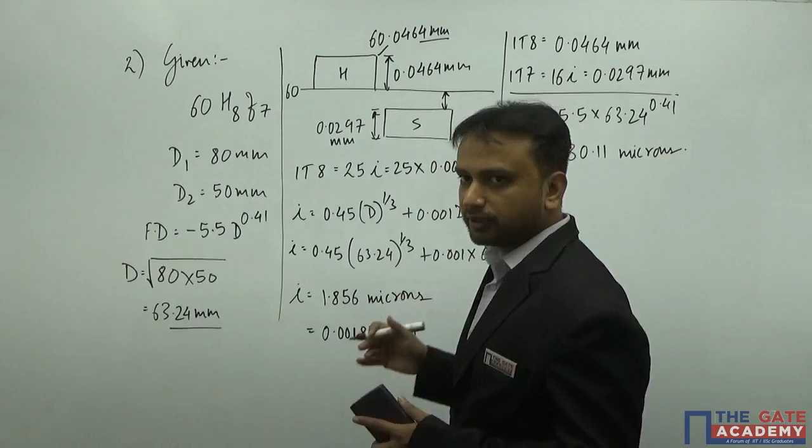If we forget about the negative sign because it only tells you about the direction, we can use the fundamental deviation as 0.03 mm, right? It will be 0.03 mm. So this is your fundamental deviation. That means this distance is 0.03 mm.

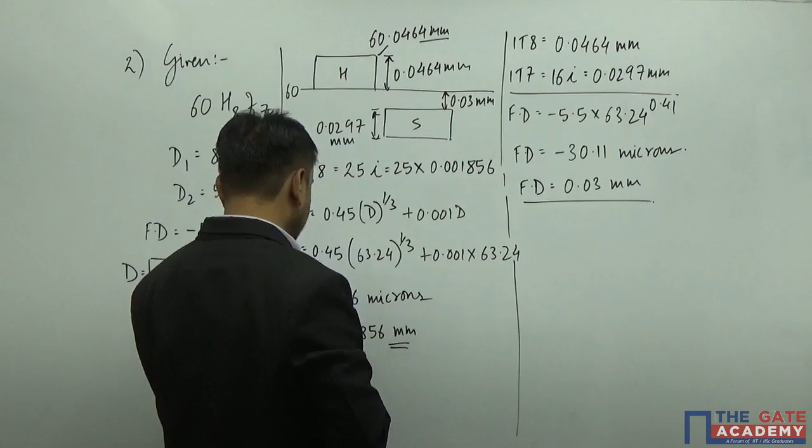Now we can determine, yes. So 60 minus 0.03, it will be 59.969. Just a minute, I did some mistake, I guess. Yes, 59.97, yes. So it will be 59.97. Let me use a different ink for this. It will be 59.97.

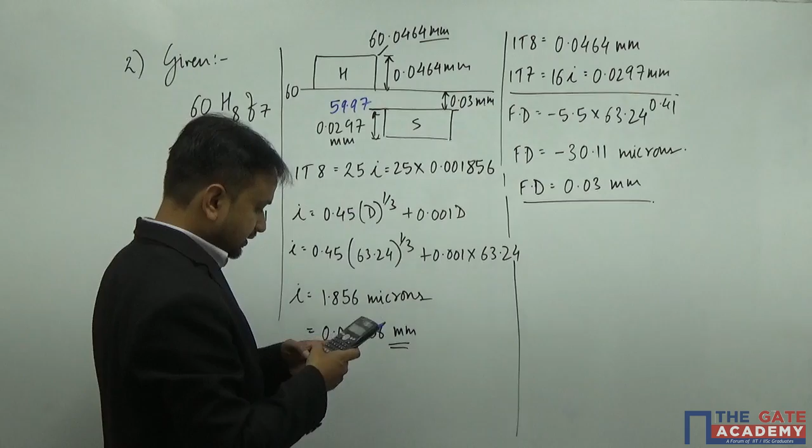And similarly, the lower limit is going to be 59.97 minus, or you can simply add this up, 0.03 plus 0.0297, and 60 minus this thing. So you are going to get 59.94 mm. So these are the sizes of the shaft, right? So what I have got is that the hole has two dimensions, which is 60.0464 mm and 60.00 mm. And shaft has got two dimensions, 59.97 mm and 59.94 mm. And this is what had to be found out, right?

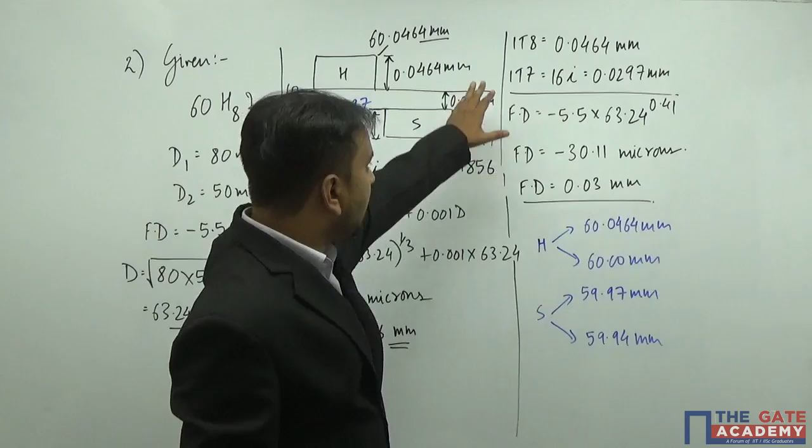So my friends, you have seen just how to use this standard tolerance unit formula, and how to find out the geometric mean and how to use it, and how to convert the units for solving for the fundamental deviation. IT8, IT7 corresponds to certain values and what that value signifies, right? So you have understood completely everything related to limits, fits and tolerances.

I hope that you have followed everything so far, and if you want more clarity over limits, fits and tolerances, try solving these kind of problems more. You are going to get a very good clarity, right?